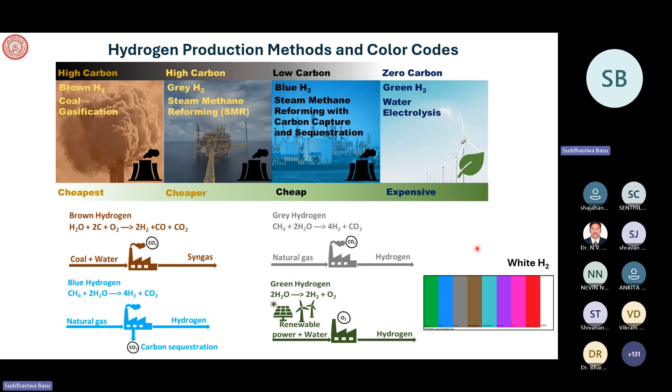White hydrogen, people are predicting, but so far it is not actually proven. They have predicted that somewhere in Africa and in the USA, underneath the surface of the Earth, hydrogen is naturally occurring, and if that is true, then that hydrogen will be called white hydrogen. But we do not know, it is all prediction. So this is what the hydrogen is.

Traditionally, different ways of making hydrogen are hydrocarbon reforming or gasification, like steam reforming of naphtha, steam reforming of methane, partial oxidation, autothermal reforming, biomass gasification. These are the hydrocarbon reforming processes. Then we have PEM water electrolysis. PEM, proton exchange membrane, I will talk about, but this is an electrolysis process.

So electrolysis is what is green, where water with electricity produces hydrogen and oxygen, and efficiency is 50 to 70%. Photocatalytic water splitting means you have a TiO2 photocatalyst; it takes a photon, then it actually has holes and

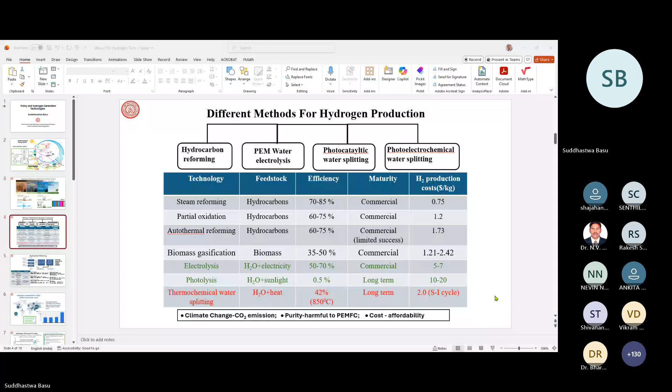Professor Basu, you have muted your mic. So it got muted. Okay, now we can hear you. I know, I am not muting it. Who is muting? If you are muting it centrally, then my mic also will get muted. No, we haven't done it. We haven't muted it. Sorry. But who muted? I'm not sure, sir. So anyway, shall I continue? You have to immediately tell me that you are not able to hear me, then I'll react. Otherwise I have to repeat. Just now, sir. That's why we have updated you. Okay, please tell me if it happens again so that I don't have to repeat it. Yeah, please, Professor, continue. Okay. Because when I'm going to the full screen, now I will be able to see it. I better see that I'm not muted. Okay.

Okay, so then the thermochemical route: heat plus H2O, and thermochemical with a catalyst, you can have water splitting as well, like the SI cycle, sulfur iodine cycle. These are the processes of making hydrogen. So first, steam reforming of hydrocarbon has a byproduct of CO2. Biomass also will produce CO2, but the biomass source is renewable because as long as earth and sun are there, biomass will be generated. Electrolysis of water is a completely green process, as I told you.

Photolysis is like photochemical, photoelectrochemical. A photon is captured by a semiconductor catalyst, and then with the holes and electrons, it produces hydrogen and oxygen after reacting with water.

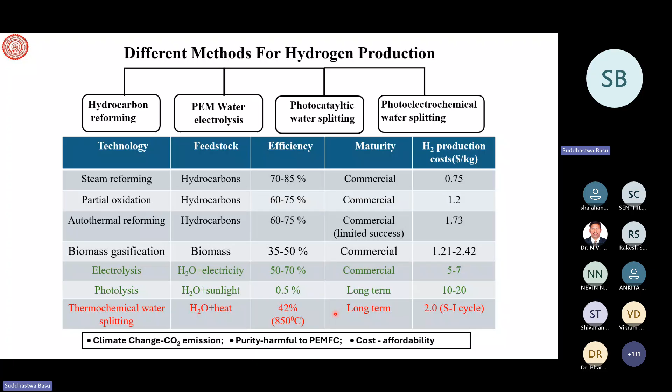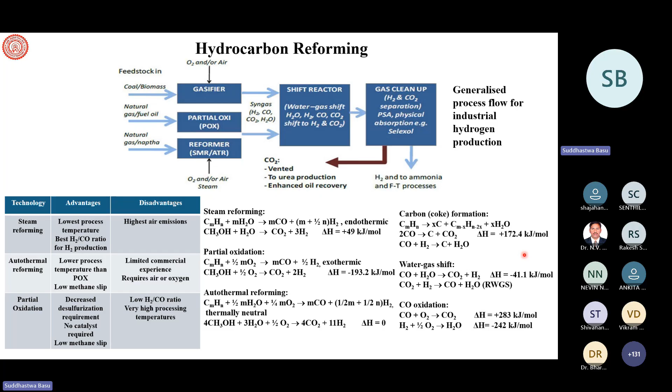And our current talk is not about the hydrogen that is coming out of fossil fuel, because it generates a byproduct, which is CO2. Correct. So that's what we don't want. We want a process where it is completely green. Okay, so before going to the technologies of green hydrogen production from water, let us see in 2021 and now in 2025. So there is slight change in the production or the requirement of hydrogen.

This hydrogen requirement is mostly in refinery, in ammonia plant, and so on. And you can see India's requirement currently has slightly increased, 7.4 million tons per year of hydrogen. The United States is about 11.3, and China is the highest, about 23.9. And all these are utilized in refinery because of hydrotreatment, in ammonia or ammonium sulfate or urea making, because you need to produce fertilizer. So that's the bulk of it.

But because of so much talk going on, so many pledges have been taken. By 2050, and India said by 2070, we will decarbonize, meaning the carbon footprint will not increase but be maintained. That means we will not emit more and more carbon dioxide. It will be maintained at the level which was there maybe 10 years back, 20 years back. And if it's maintained, then the Earth's surface temperature will not rise and we will be safe. So everybody is taking pledges, and hydrogen demand and green hydrogen demand would increase.

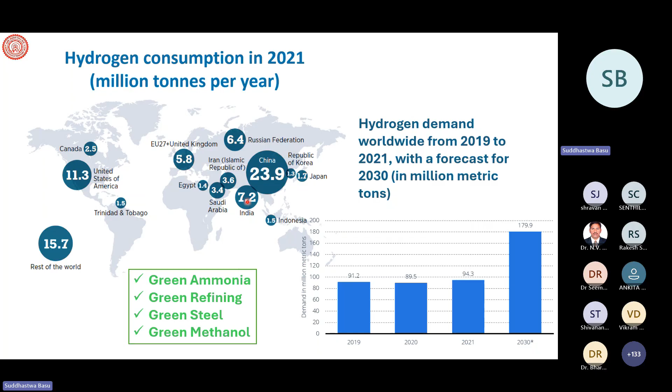It is going to be almost 30 million tons of hydrogen per year for India by 2050. By 2030 it will be about 13, 14 million tons per year. Currently it is 7.2 or 7.4 million tons per year, as I was showing you in the previous slide. 7.2 maybe in 2021, today it may be 7.4 million tons per year. Okay, so the hydrogen demand by 2050 is going to rise like anything for India, and it's going to be close to about 27, 28 million tons. Today it is 7.2, so almost 4 times what we are today.

And how are we going to use it? You can see here that fossil fuel oriented ammonia, methanol and refining are going to become green ammonia, green refining, green methanol, green steel, and transport also. So all these areas are industrial use; transport is very less. In 2050, the majority will be industry using green hydrogen, which is the green part, and the gray hydrogen is reducing. Different gray shades for different types of hydrogen. In the case of methanol and ammonia, fossil is going to peak at 2030, then it will decrease.

But green hydrogen use is going to increase. That is what we have shown you here. Mostly in industry, a little bit in transport and a little bit in power. So this will happen. A lot of big investment is required. And already the government has been investing for the last 2-3 years.

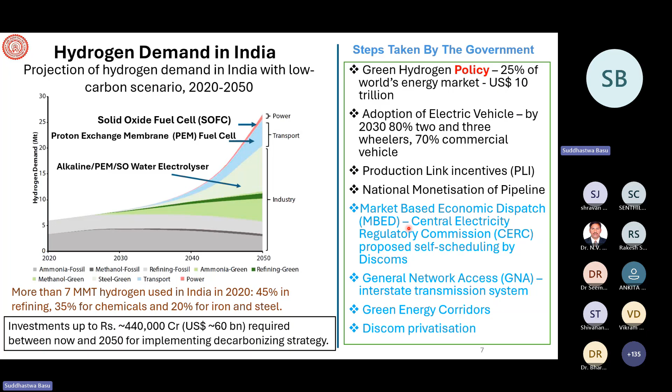And other things are going to come, which I'm not going to discuss much because this is all policy, right? So let us move forward.

Here I'm showing how we are going from 7.2 million in 2021, maybe 7.4 or 7.5 today in 2025, to about 12 to 13 million tons per year by 2030, and 28 million tons of hydrogen by 2050. This is the demand in India alone. And there will be demand also in the world.

India has very good sunshine almost throughout the year and throughout the country, so using photovoltaics and also wind power, the green hydrogen production scope is much higher in India. Having a coastline with so many ports, if you produce hydrogen from photovoltaic parks and then immediately ship it through ports to other countries like Europe or Japan, it will be a very good business proposal. And that's what is happening.

So based on these policies, Acme Solar, Adani Group, Amp Energy, Avaada, Azure, Greenko, JSW Energy, NTPC, Reliance, ReNew Power, Tata Power, Torrent, everybody positioned themselves in different parts of the hydrogen value chain: electricity generation through photovoltaic or wind power, using that electricity for electrolysis of water to make hydrogen, storing it as energy storage, and supplying hydrogen to different places and exporting it to other countries.

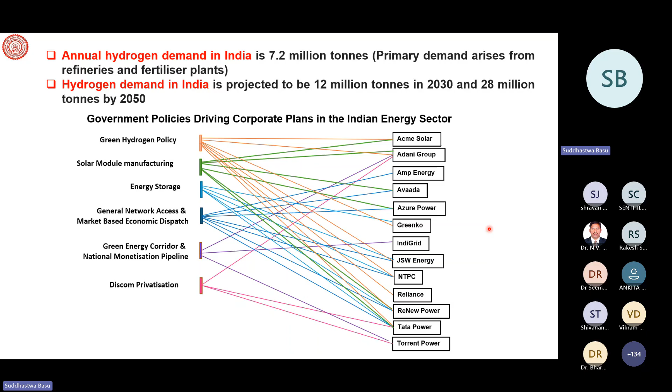Otherwise, naturally, you would have seen that hydrogen is coming and taking over every source of energy that we talk about. But this is not going to happen because the cost is very, very high. So that's how the policy is important, and I wanted to discuss this. So this is cost, and cost I have already talked about.

Now let us come to the technology that we wanted to discuss. I'll only talk about the electrolyzer or electrolysis technology, which people thought to be a very fast responding technology, in the sense that you can produce hydrogen in large amounts quickly, and you can regulate the production. Whereas if you talk about photocatalytic, the process is very slow. If you talk about microbial electrolyzer or microbial technique, the rate of generation of hydrogen is also low. So this is a very good responding technology for hydrogen generation from splitting water, or electrolysis of water.

Okay, so there are two ways the water can be split, in the presence of alkali and acid. I'm showing you the reaction. This is electrolysis; I'm sure all of you have an idea about what electrolysis is. You have an anode and a cathode, known as electrodes, and then you apply a potential difference between the electrodes. Then it undergoes electrolysis of water, as shown here.

In the case of alkaline electrolyte, when KOH or NaOH is used as an electrolyte, water will take two electrons, because you apply potential difference, and produce hydrogen and hydroxyl ion. The hydroxyl ion from the cathode will move to the anode, and it will undergo an oxygen evolution reaction, OER, and hydrogen evolution reaction, HER, as I mentioned here. So the hydroxyl ion will be transferred from the cathode compartment to the anode compartment, where it will split into oxygen, H2O and 2 electrons, and these 2 electrons from the outer circuit will again reach the cathode, and the process continues. So this is an alkaline electrolyte electrolyzer.

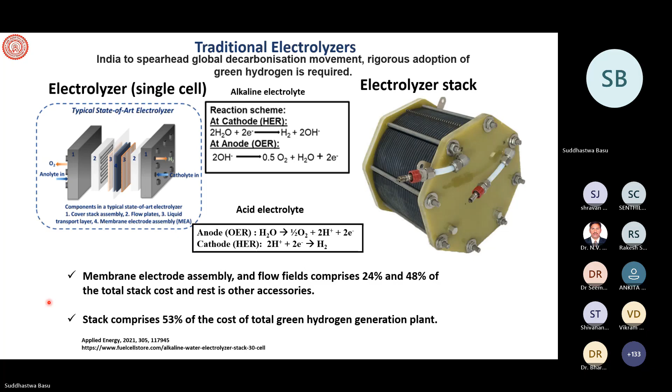So how does an alkaline water electrolysis cell work? Cathode and anode reactions are shown here.

Is anybody having any question? You can raise your hand, or maybe we will do it at the end, not now.

Okay. So the schematic diagram of alkaline water electrolysis is shown here. At the cathode, again I am repeating, this was shown before, it takes water and two electrons and produces hydrogen and hydroxyl ion. The hydroxyl ion moves internally from cathode to anode. It gives up oxygen, H2O and two electrons. These electrons are released and move through the potential difference towards the cathode again, where electrons plus water produce hydrogen and hydroxyl ion, as we talked about before. So this process is going on here.

Let us see the elements involved in the alkaline electrolyzer. You have a diaphragm to separate the anode and cathode, because they should not touch, otherwise it will short, and electrons will move through this, not through the outer circuit. So a diaphragm is kept between anode and cathode, and in the first reaction you are fed with water; it takes two electrons and produces hydrogen and hydroxyl ion. This hydroxyl ion moves to the anode, then it splits into oxygen, water, and electrons, which is what is shown here.

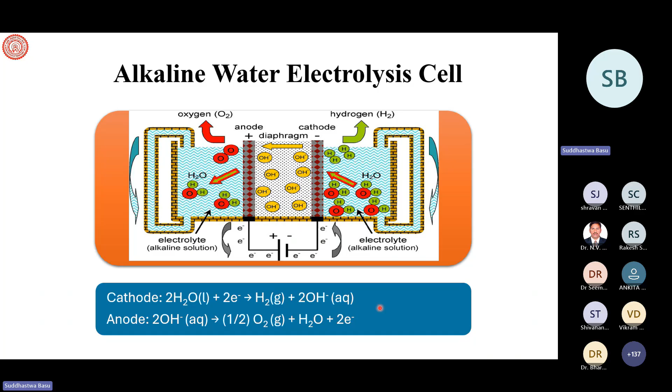In a way, it produces oxygen and hydrogen, and that is what an alkaline electrolyzer is. So I just wanted to show that this is not enough, right? Only producing an electrolyzer will not help. The electrolysis process produces hydrogen and oxygen, and your delivery point is here, where hydrogen should be available at a certain pressure so that it can fill another tank, and at a certain purity. So that is important, right?

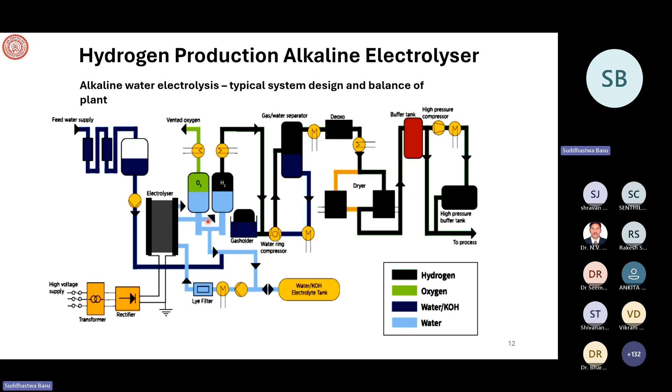Now I'll talk about photocatalytic and photoelectrochemical water splitting, which I have been talking about.

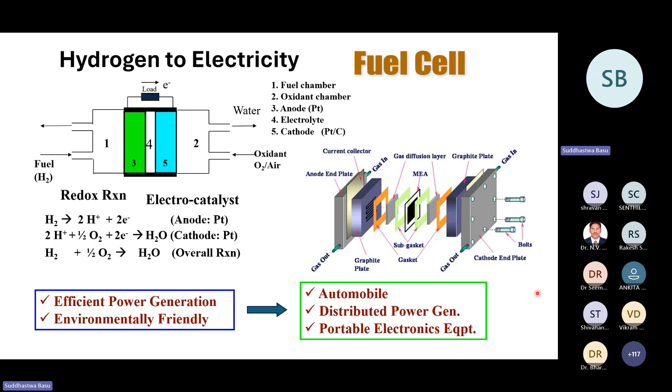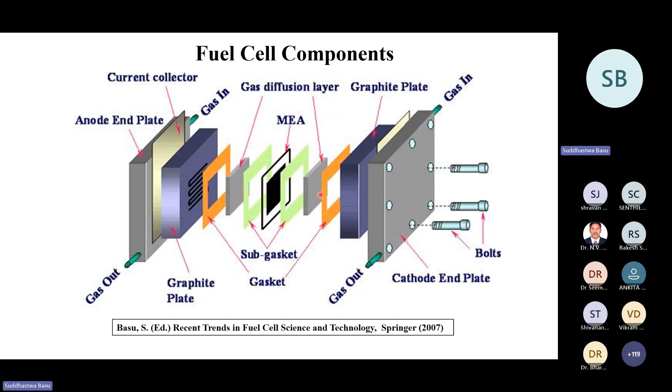That's the advantage. Here it is being blown up or magnified, the whole membrane electrode assembly, the sub gasket, the graphite plate, or the fuel distributor, as shown here, right? This is membrane electrode assembly. This is a gasket, sub gasket, gas diffusion layer. Then this is a graphite plate through which, via this serpentine flow field, the gas moves and gets exposed to the anode. Oxygen or air comes, gets exposed to the cathode, and those reactions take place.

It's like a polymer sheet, and it's generally wet when you are utilizing it, and it allows proton transfer to take place through this. Nothing else can be transferred. Moisture or water is transferred, because proton requires water for transportation. That is allowed, or that is how it is designed. Nothing else, no other ions are allowed. Now, what is the design? Why does it behave in such a way?

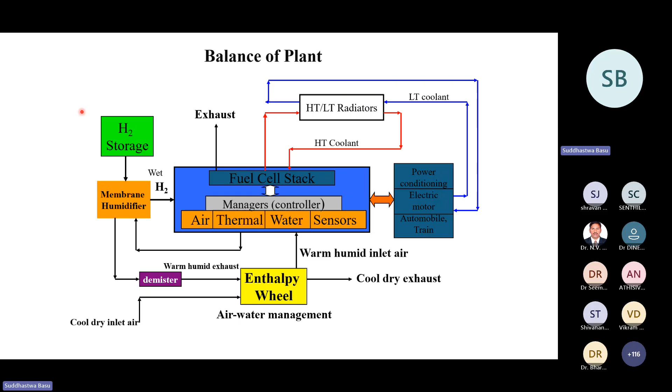And then we have a demister shown here. The enthalpy wheel will take out water and heat. Then you release the unwanted water vapor if it is not required. Warm humid inlet air is given there, coming from this side. Cool dry inlet air, with the enthalpy wheel, is exchanged and heated to the operating temperature, so that the cathode side air is also working at 70 degrees Celsius. No temperature gradient. So except for the fuel cell, whatever else you are seeing here is called balance of the plant.

So we are all working in these areas at IIT Delhi. We are working on a micro electrolyzer developed at TRL4. We have a startup. We have electrocatalysts for non-PGM alkaline electrolyzer and PEM electrolyzer, meaning non-platinum group metals like phosphides. We do a lot of modeling. We have fuel cell development, fuel cell poisoning, a direct hydrocarbon PEM fuel cell we have developed, and solid oxide fuel cell we are working on. We are working on lithium and sodium ion batteries, spent battery recycling, and electrocatalyst development.

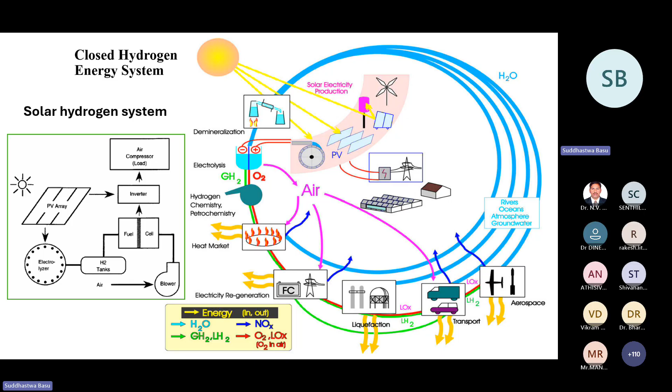Let me see. PowerPoint Live, preparing your slide. Correct. So let me go to the relevant slide. I was in this slide. So this is the slide.

it is gone now again. It is automatically not allowing me to share. I don't know why, but let me see where it is.

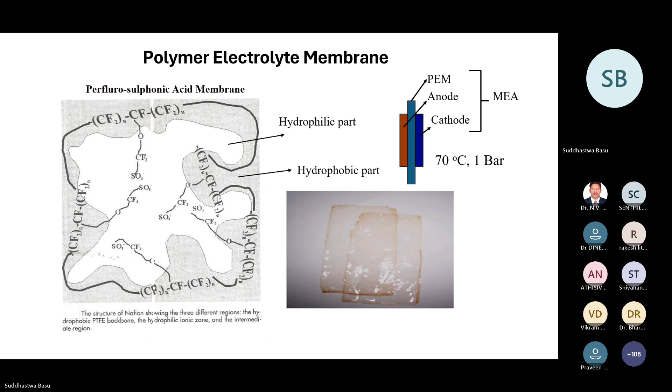Any more questions? Okay, sir. In the starting, you explained the applications of hydrogen gas and all this, sir. What are the brief practical applications? Can you please explain again, sir? Yeah, I think I was talking about applications. I'm not going to the slide again because there's some disturbance, it looks like.

The main applications in the hydrogen industry now are three. Because no one wants greenhouse gas emission, we want to stop CO2 or carbon emission. You need to produce a lot of fertilizer for agriculture. All countries, Africa, India, Asia, Europe, North America, South America, Australia, everybody requires agriculture. That is the mainstay of human civilization. And because the population is increasing, you require a lot of fertilizer for good growth of all agricultural products.

And ammonia, urea is the main fertilizer, right? NH3, (NH4)2SO4, or urea. So you have nitrogen and hydrogen in that; nitrogen comes from atmospheric air, and hydrogen comes from fossil fuel, steam reforming of naphtha or methane, and you have CO2 emission. So the first utilization is, as everybody is saying, we want to decarbonize to make green ammonia.